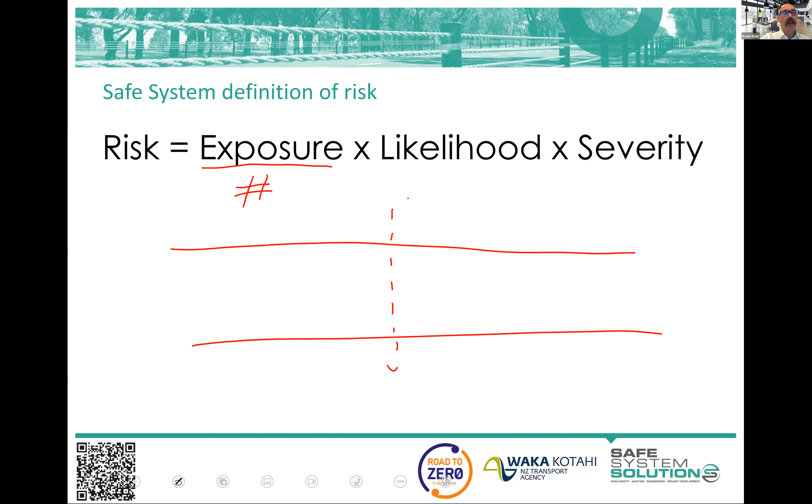We've been talking about exposure and likelihood and severity, and most people struggle a little bit in getting their head around exposure, and that's understandable. But I just want you to think of exposure as numbers. Just think of it as volume: number of vehicles, number of pedestrians, number of cyclists. Say we've got a bit of road like that, and we've got pedestrians that cross the road there. Our exposure there is based on the number of pedestrians crossing.

If you then propose to do curb build outs or curb outstands, you lessen the distance to cross. In a safe system assessment, that is a likelihood reduction. We have not changed the number of pedestrians that are crossing, thus we have not changed the exposure. We've changed the chance of a crash because they're out there for less time. Before the safe system assessment extracted exposure from likelihood, they were built together, and we would have talked about that as exposure in road safety analysis for many years. So there's a terminology confusion there, but that is likelihood.

The reason for that is that when we start to put numbers to these and quantify these, we don't want to double count benefit or double count risk. So we're trying to segment them out. I hope that helps you. Just think numbers when we're talking about exposure.

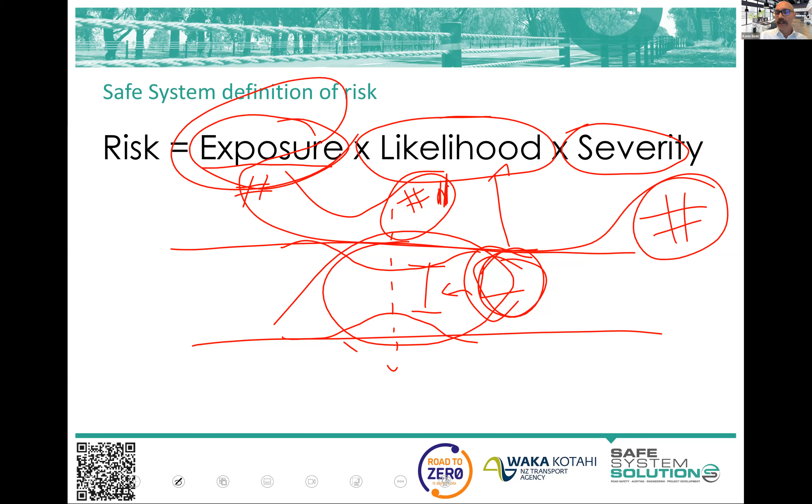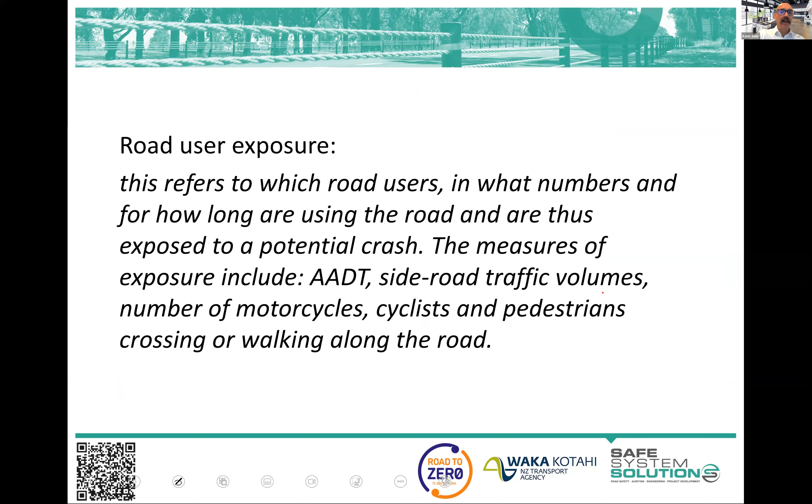When we get to the extreme ends of it and we're able to block off, in this case, a level crossing, we know that we've eliminated the exposure of vehicle to train crashes. The numbers are 0. Likewise, if we've moved the bikes or pedestrians away from the vehicles, the number of those pedestrians and cyclists exposed to vehicle crashes is lower or 0. So we've removed the conflict numbers. Here's an actual definition if you need it: AADT, side road traffic volumes, number of motorcyclists, cyclists, pedestrians walking along. So I hope that's helpful.

Now, Kathy, I'll get you to put these fact sheets into the learning management system, because over time we have identified quite a number of things that Austroads and Waka Kotahi haven't provided specific guidance or direction on. So working with industry and others, we've come to a way that we could think about this and put that down. Hopefully, if Austroads does a version 2 of the Safe System Assessment Framework, or there's further supplementary guidance provided by Waka Kotahi, this might be included.

But this tries to address some of those curly questions around scoring associated with even things like intersections. How do you score an intersection? Do you add the two? Do you multiply the two volumes? Do you multiply them and then square root the product? There's many ways people could get to that. So we've explained why adding has been the one that people have chosen.

Thinking about bicycle facilities and when does a bicycle facility influence exposure or likelihood or severity, and then how do you do a long route project? How do you assess something if you've got many intersections along a route? And so some explanation around that. And we also talk in there a bit about those seasonal or very altered times. So they might be helpful as you get into the depths and the specifics.

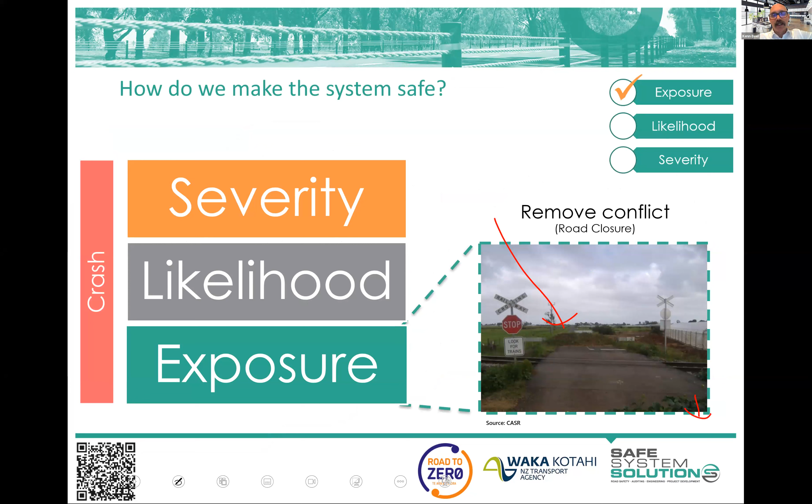So the question came in there just around level crossing one, and maybe I need to use a different photo, because it kind of looks like you can still get in there. There is actually a big amount of dirt on this side as well, which you can't see, so you can't actually drive into that area. You can probably walk into it. Exposure for pedestrians is probably different, but it's a little bit of a different view there. So sorry about that.

Sam, maybe this is a question for you, because you do a lot of the assessment of railway level crossings around New Zealand using the assessment model, ALCAM, is it? That's right. And so exposure is factored into that within the model, isn't it? Very heavily. Essentially, it's the exposure of the traffic going over and the number of trains coming along. It's all built into the ALCAM model. And the severity is pretty easy on ALCAM, because if a train hits you, there's not much else you can do, really.

So in a safe system assessment, if we have a level crossing, we treat it like any other. You're thinking about exposure being the number of vehicles and number of trains, and then you think about the likelihood based on all the factors, and that's where ALCAM has a huge raft of factors for likelihood, and then severity is going to be at your maximum end because it's a train. Yeah, thanks, Sam.

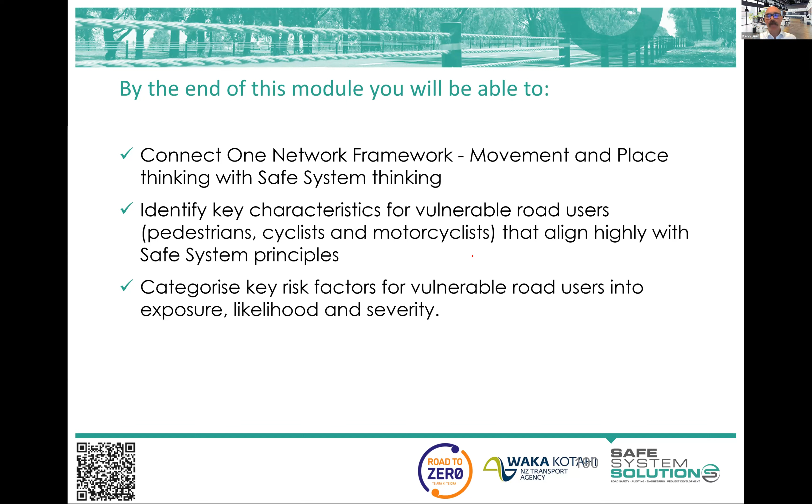So before we get into the mechanics of writing out the scoring of a safe system assessment and how you determine the number, we want to round off our thinking about the safe system and contextualizing projects by talking about the One Network framework, movement and place thinking, and why that's important within a safe system assessment, and ensuring we have a good grasp on pedestrians, cyclists and motorcyclists, what aligns with safe system principles, and the risk factors associated with exposure, likelihood and severity for vulnerable road user groups. That sets us up for next session, where we dive into filling out the forms.

Now, the One Network framework, movement and place, is something some of you are absolute experts on, and probably wrote some of the guidance and documentation for Waka Kotahi, for AT and for others. By no means within a safe system assessment do you need to be an absolute expert in it. But the reason we want to understand the context of a project within its strategic objectives for that network is not really particularly for the assessment of a proposal.

It's for the recommendations that we make, because you can achieve very good alignment with safe system principles in many different ways, but it comes at the cost of one thing or another sometimes. It comes at the cost of the time it takes vehicles to move through an area, or time it takes cyclists to move through an area, or it could come at the cost of the place, the feeling of place in an area, the community interaction, trading, socializing in that area.

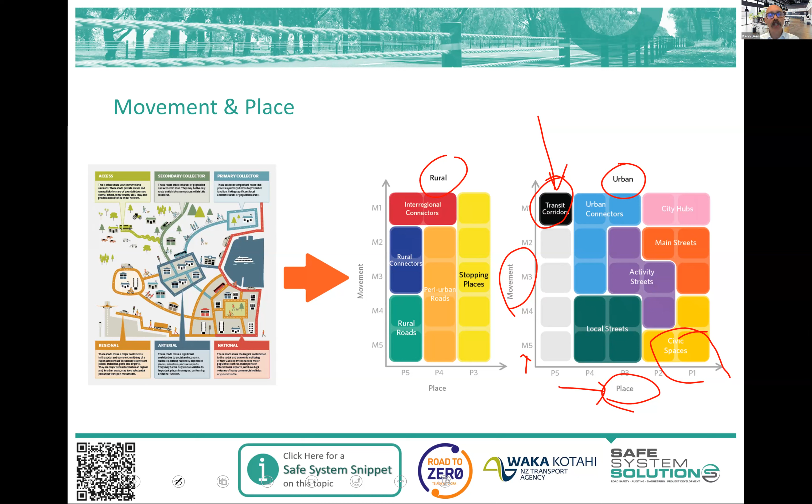But when you're embarking on a safe system assessment, talking to the project team and potentially strategic planners for the council or Waka Kotahi or the other area to understand what are they trying to achieve out of this? Where does it fit within the strategic framework? What are the movement and place categorizations of this? That helps you then with those recommendations. So if you're down in civic spaces, we know we're into these environments where we can look for safe system aligned measures that also give us that ability to trade, to interact, and to have an area where people congregate.

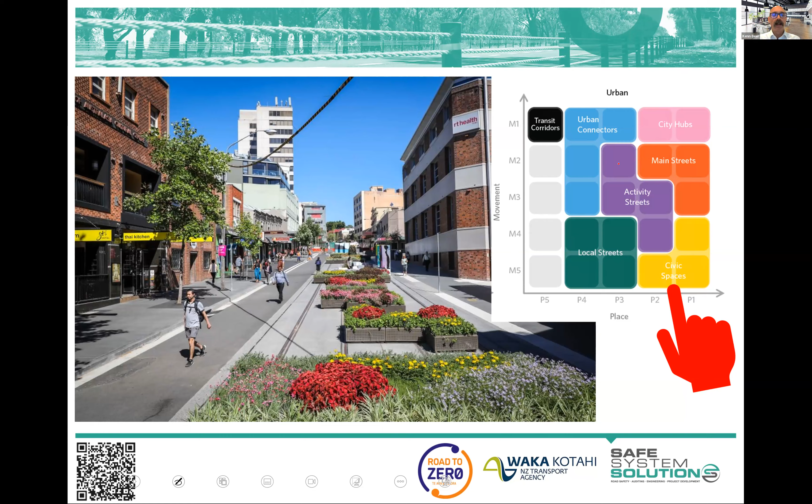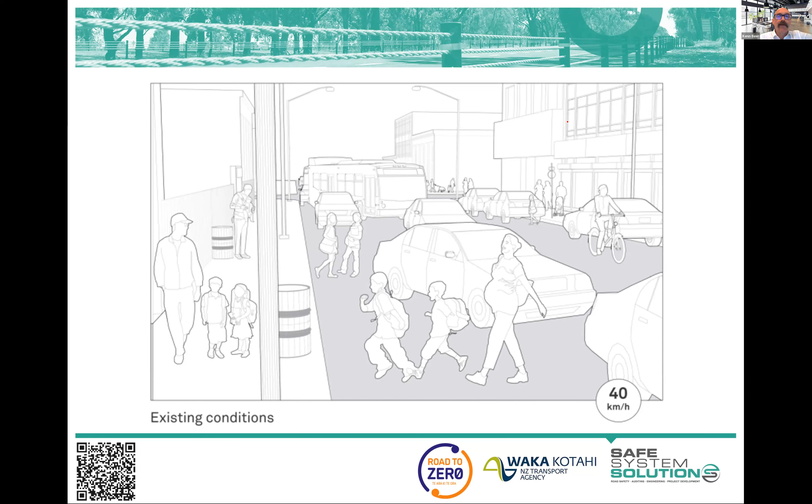So I think that's all I'll talk to on that one, and some artistic impressions, just for fun. This is actually US guidance, but you can immediately see it's more of a place for people there to hang out, trade, socialize, play, have a coffee. You can see it's going to be safer. You're going to get less vehicles through there. So your exposure will be low, but being able to quantify that's interesting.

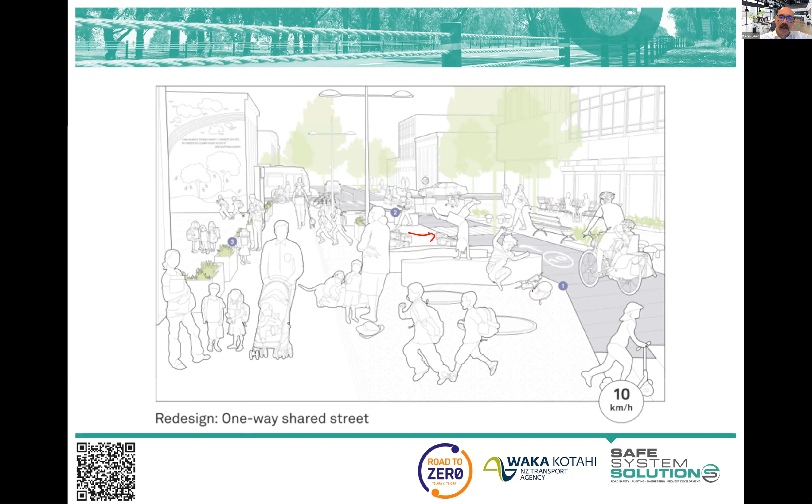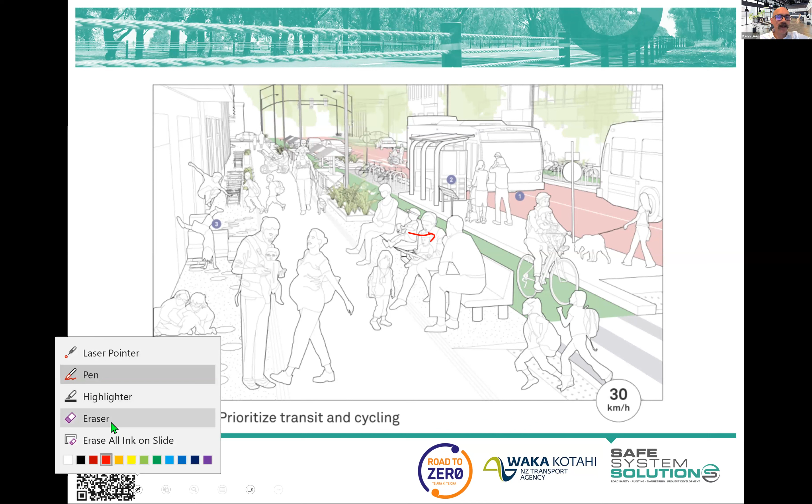I don't particularly think they need that crossing point. I think the whole area as a shared zone is fine, but I think you get the point. As movement demand increases, or your strategic planners are talking about more movement, as I mentioned, segregation of mode and creating those throughputs through mode has very good safe system alignment, and you're still able to maintain pretty good place value, as you can see there in that artistic impression.

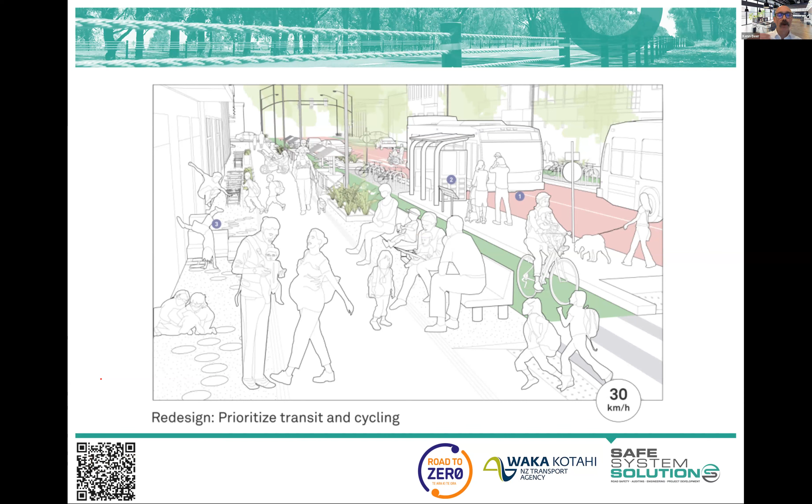Now, you take these with a grain of salt, and it's hard and messy to actually move through and get these sorts of things. But if you can see them as aspirations and work towards them, it's good and it's helpful in our thinking about recommendations. So I'll keep us moving along. We've got just about half an hour to go.

Local streets in this categorization, there's a whole lot of different terms around the world for how people categorize movement and place, or link and place. The principles are the important ones. So at these lowish place value, low movement areas, local streets, residential streets and the like, you really start to think about safe system alignment through management of speed, because we're able to take advantage of these lower movement requirements. So vehicle speeds can significantly be reduced, giving our safety outcome from that perspective.

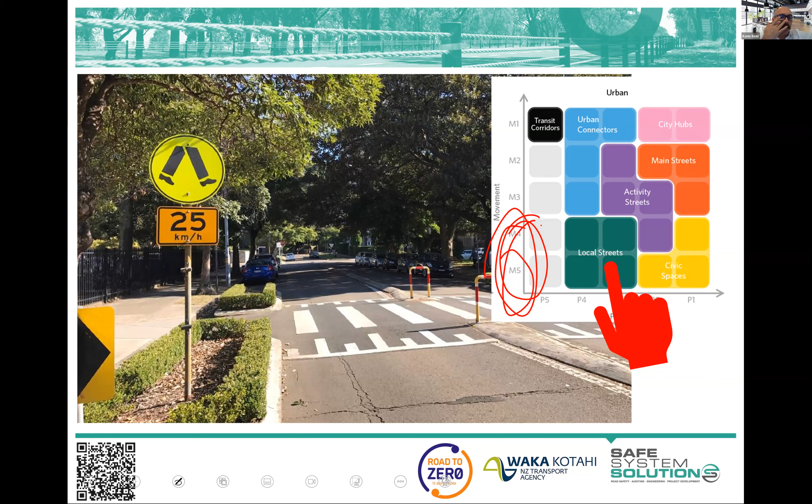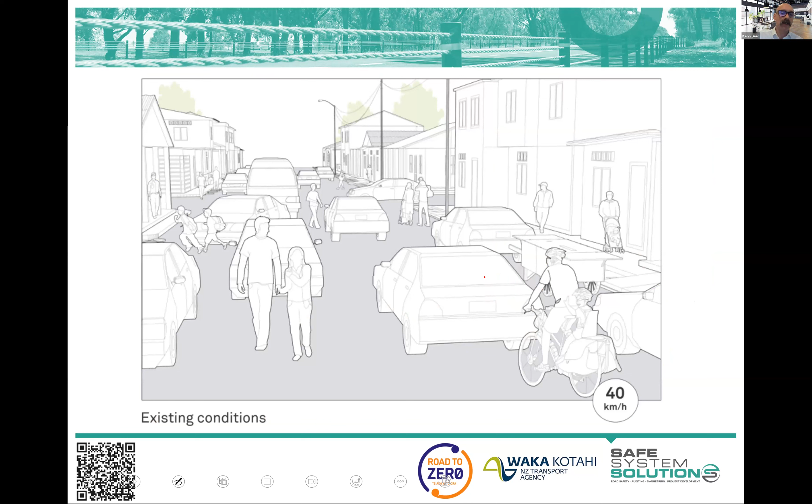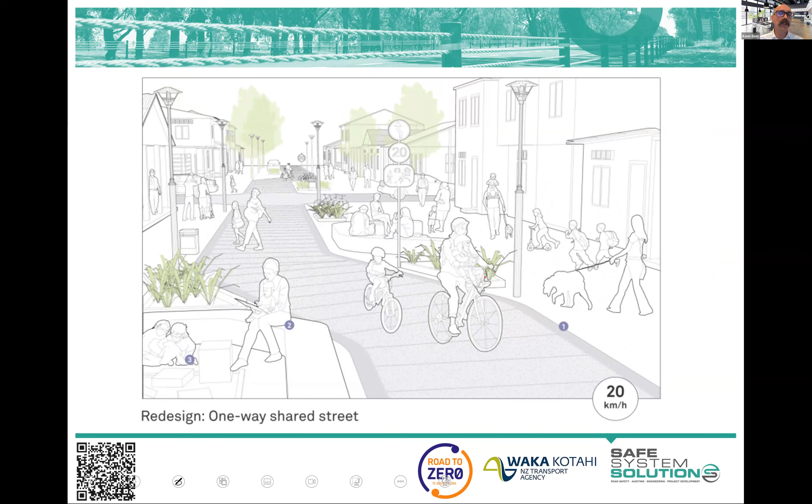You're not going to do things to, in any way, shape or form, increase vehicle travel speeds through there, because the importance of that is not there. And you do erode other social benefits and active transport choices and those sorts of things. So this is a very populated residential street cartoon, but again, we see slowing of vehicles significantly, because the movement of people and goods through that area is not important. It's minor access, and we can slow vehicles down.

The challenges really begin, and I always talk about this. It's easy up here, and it's easy down here, and generally kind of easy in there. It's up at this end where it's just really hard, because people are asking everything from a corridor. They want it to be the public transport priority. They want vehicles to move through there quickly. They want everybody to be safe, and they want it to be a vibrant place where people can hang out, and it becomes a real challenge.

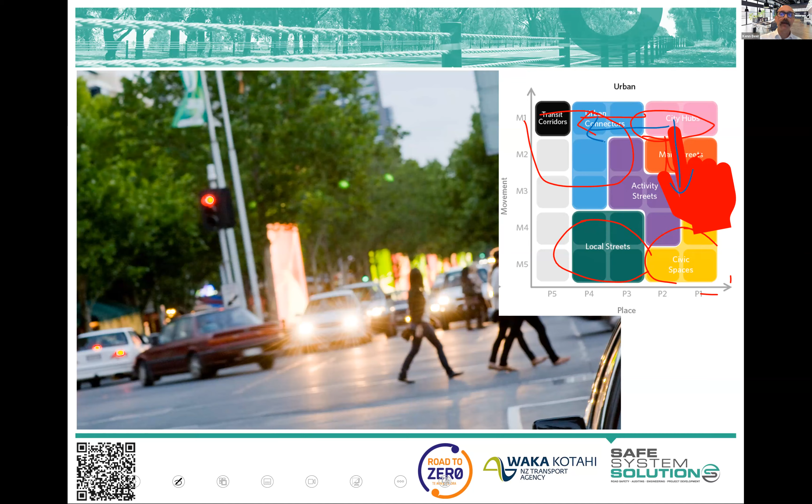I always will start in a safe system assessment and try to push strategic planners or project teams and say, no, give me something to work with here. Tell me, are you wanting to go this way, or are you wanting to go this way? Oh, it's a bit harder. Are you wanting to go this way? Give me something. Because as soon as they're able to do that, it really frees you up in how you're going to alter or suggest altering this network. But sometimes it's very hard. So we'll do this one very quickly.

We're getting some Wally advice in the chat.

This one, for example, you've got a road here and we say it's really aspiring to actually sit in the city hubs type area up there in the pink. It's currently high traffic volume, it's got a lot of pedestrian activity, it's got pedestrian overpasses, and you can see that. What sort of alterations, again, with your exposure, likelihood and severity? Quite quickly here, chuck a few ideas in on this type of environment, sitting in a very different categorization there. So any thoughts on that?

Yeah, so I'll... Ooh, one of those fancy Brazilian bus stops? I'm not 100% sure what is meant there. That's brilliant, Jenny. You could write anything. One of those fancy Ukraine, oh no, not Ukraine. Anyway, you know what I mean? You could just about write anything. People go, oh, sounds good, you got my attention. Fancy Azerbaijani roundabouts. Yeah.

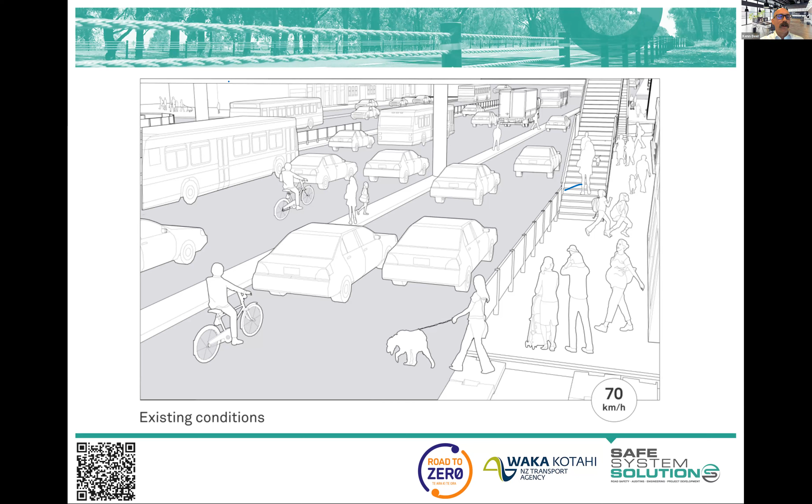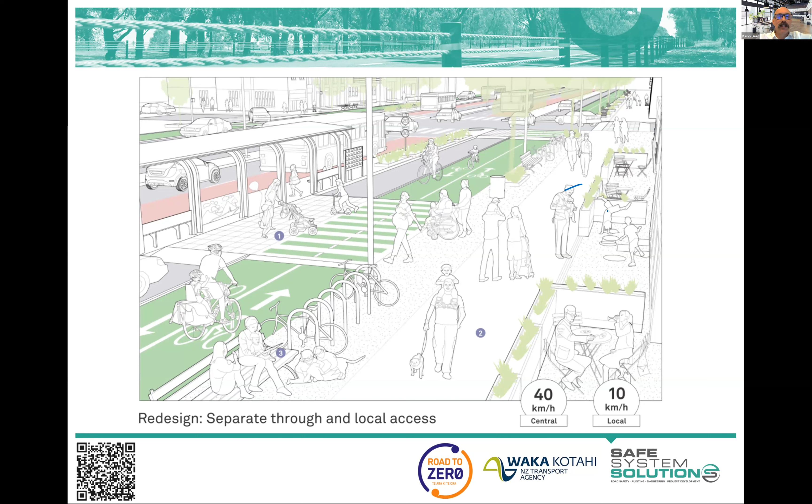Okay, so let's have a look what the artists have done here. Take everything on artist impressions with a grain of salt, but I think the overarching look and feel of it in that large carriageway style gives us that movement function through different modes. Yes, it's probably not going to be as good for cars to get through there, but in terms of getting people and goods through, I think we're still achieving our requirements at reasonable speeds. You can see the increased place value of the area, and the safe system alignment is fairly clear with raised intersections and separation. We do see this movement towards areas that maintain a movement function of people and goods and are having some place value.

Now, you may question, can we go further into the place and actually start to really limit movement of vehicles through these areas and the like? But if everybody's prioritising everything, then that's what it is.

And of course, signalised intersections do often play out in these sorts of environments, and I do remind that protected intersections are very well aligned with safe system principles for reducing the likelihood and severity of crashes, where we have the vehicles making that turn where there's great sight lines.

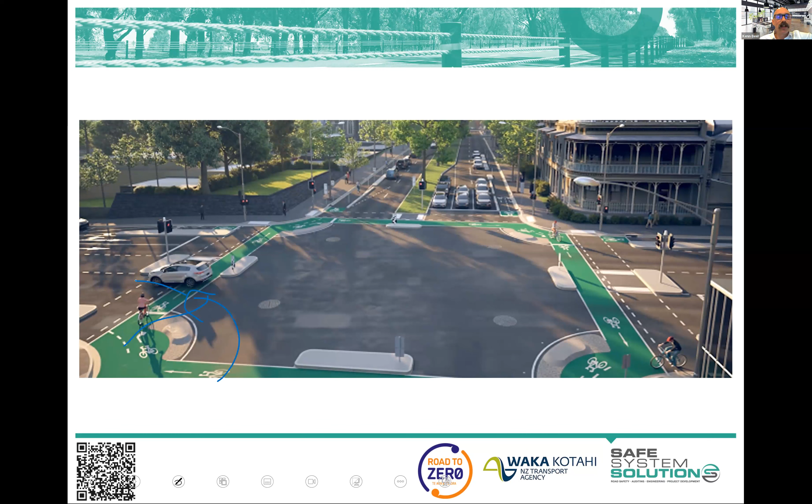Now, in this course, I'm not going into a lot of the details of anything associated with infrastructure design or specifics and the like, because we're just setting up a set of principles for you to look at any area. But these sorts of features tend to align really well with what we're trying to achieve there.

Then when we get into the urban connectors or transit corridors, somebody's made a distinct choice to move people and goods through that area at speed. Now, okay, the picture I've got there is of vehicles, but it could just as well be of a dedicated cycleway, or the like. But you're going to try to maintain some speed through there.

And this is where you start to get into those things that we talked about, possibly pedestrian overpasses, possibly fencing off areas from pedestrians crossing, congregating, and the like, because a distinct choice has been made. Yeah, sometimes people get annoyed at this, but if we're going to manage our whole transport network, some of the roads are going to be transit corridors, and thus we should try not to think that we're going to do everything for that corridor.

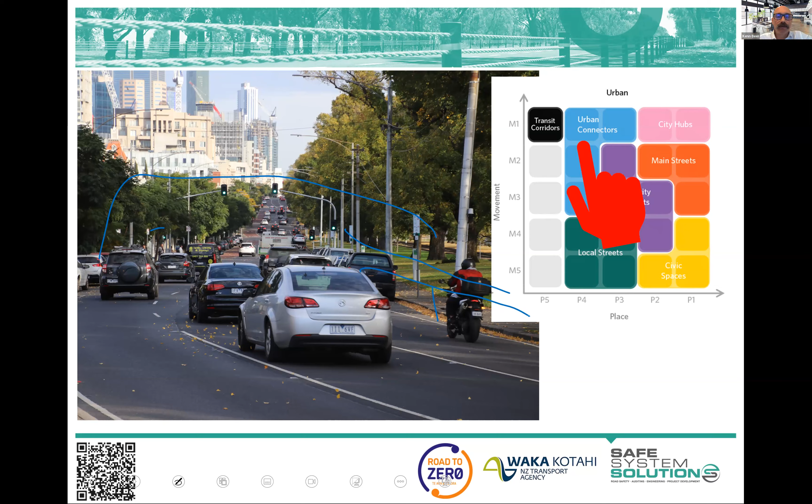And we do still need to be very conscious that even though it's a movement corridor, areas of conflict above our safe system tolerable thresholds need to be addressed, such as our large signalized intersection. And we need to bring speeds within tolerable levels within these locations, as you saw with our raised intersections and those sorts of facilities and features.

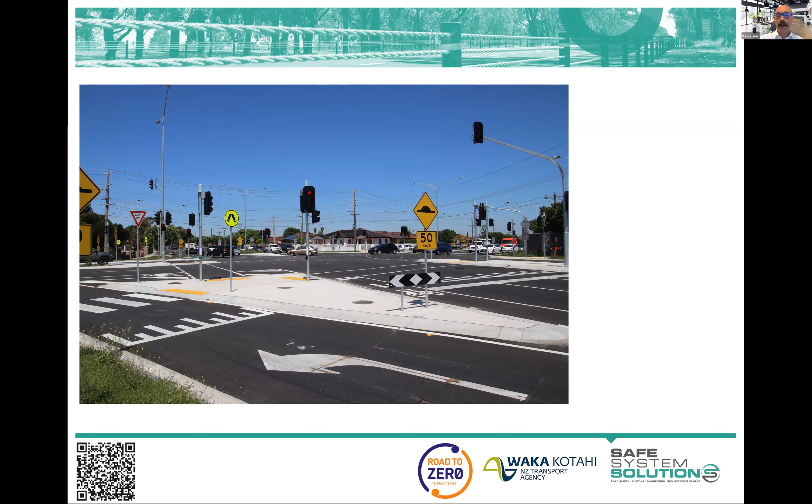I think people thought Wally was asleep or something, but he's still here, don't worry.

Okay, so cyclists and pedestrians, obviously the most vulnerable road users, and we're talking severe injury risks even around 20 kilometers per hour. And then as we saw, 30 kilometers per hour is where it really kicks up badly. And young and old, even more vulnerable. In a safe system assessment, you may factor a little bit of that into your assessment, but it's probably not enough to make major significant changes.

Old people obviously can't handle forces anywhere near what younger people can. Young people actually withstand a lot of force. However, often the mechanics of crashes are young people being struck in more vulnerable parts of their body, the head especially.

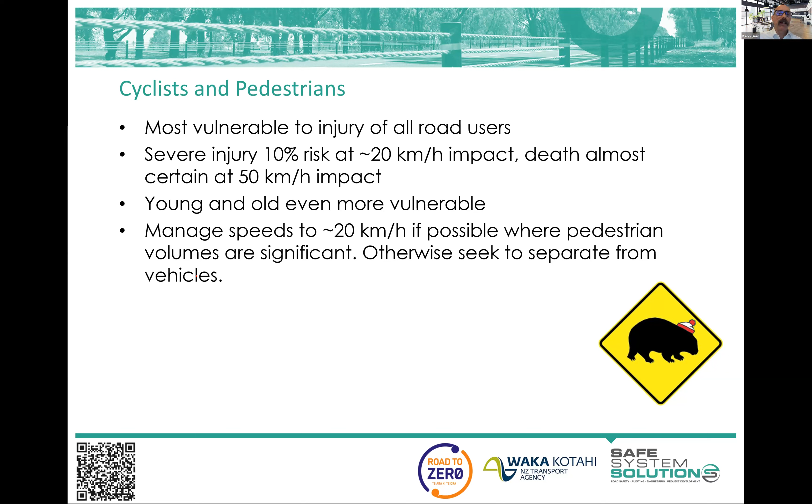So thinking about managing speeds down around 20 kilometers per hour where pedestrian volumes are significant is important, and otherwise trying to separate it. And that sounds simple, but it's very challenging. But separated facilities, Copenhagen style lanes, and I've got pictures on this presentation from all over Australia, New Zealand, and around the world, of different ways to think about it. But the principles are there that we are separating those modes.

Now, remember, I had a full fact sheet on whether this sort of treatment is going to impact exposure or likelihood or severity, because it gets a little bit challenging to do that. If there's no access points and you've done that at the mid block, I would say that's exposure. If you've got intersections and access points, I would say it's likelihood, because you've still got the chance of a vehicle to cyclist crash, but you've lessened the likelihood of it for a number of reasons.

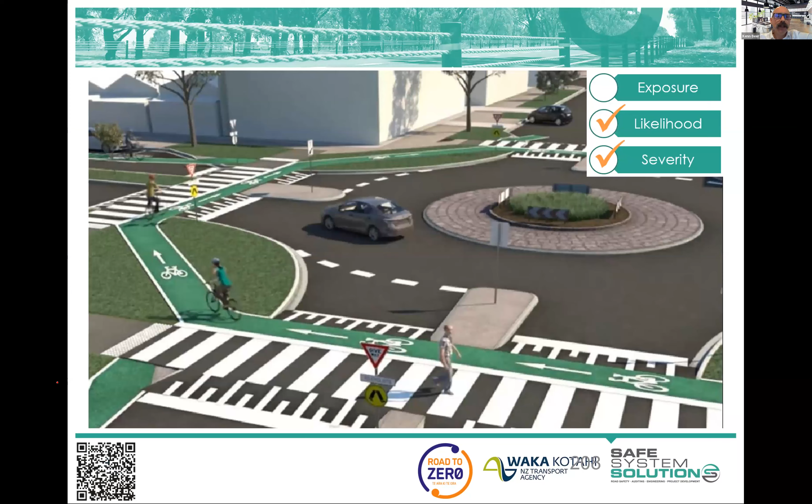And roundabouts, of course, I'd like to show the way you can continue to maintain those wonderful safe system features of a roundabout, and all the different benefits, but also provide facilities that reduce the likelihood and severity of crashes involving pedestrians and cyclists, such as these protected roundabouts, as you can see there, with features around it slowing vehicles at conflict points, reducing the likelihood and severity of crashes at these locations.

And also, this is a wonderful place-making feature, but also a movement feature for those other categories which are often forgotten, which is pedestrians and cyclists. They are movement. They require their movement function as well. And if you're prioritizing those modes in different areas or different streets or roads, we should be catering for that.

And it gets challenging and murky when you get bigger, and we see very challenging pedestrians and cyclists through multi-lane roundabouts, and I don't think anybody in industry's got this right without spending a massive amount of money, which I think we should be doing often with pedestrian and cyclist underpasses over the multi-lanes. But this is where we're getting stuck in trying to do multimodal shares.

But these ideas are decent, where you actually create priority for pedestrians and cyclists through these sections, and then I'd like to see these go under if you can. But if not, what we're trying to do is reduce the likelihood of crashes as much as possible through squared up and places to wait.

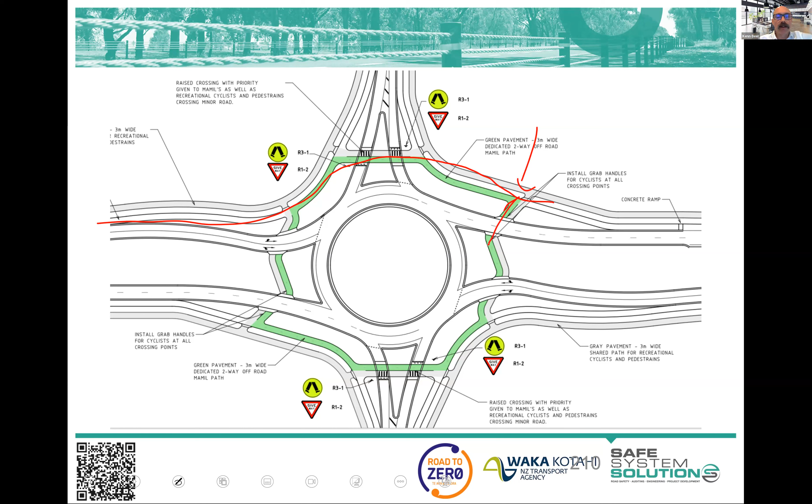From an active transport use perspective, it's not great. It's going to very much limit. You're not going to have old people crossing the road here, that's for sure. So you've got to factor that into your thinking, and cyclists, it's only going to be fairly confident cyclists that are going to dart across multi lanes of traffic there. So limitations there.

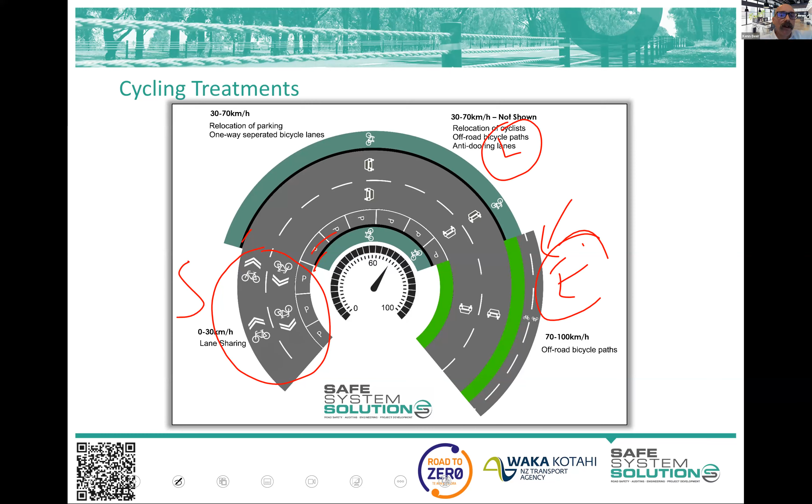Pedestrians. If we've got an area that has enough pedestrian activity, or we're aspiring to enough pedestrian activity to prioritize pedestrians, it's imperative that we address the severity of crashes at that location. And so I can't see any environment where it's acceptable to have an at-grade pedestrian crossing, so a zebra crossing, without some speed management measures.

If the area itself is very well speed calmed and the speed on the approach to these is low, fine. But if the speeds are above that 30 kilometers per hour, speed calming measures have to be put in place to give us the severity reduction. And we know that raised crossing there, for example, is highly aligned with safe system principles, because we know there's a reduction in the likelihood of crashes and severity of crashes.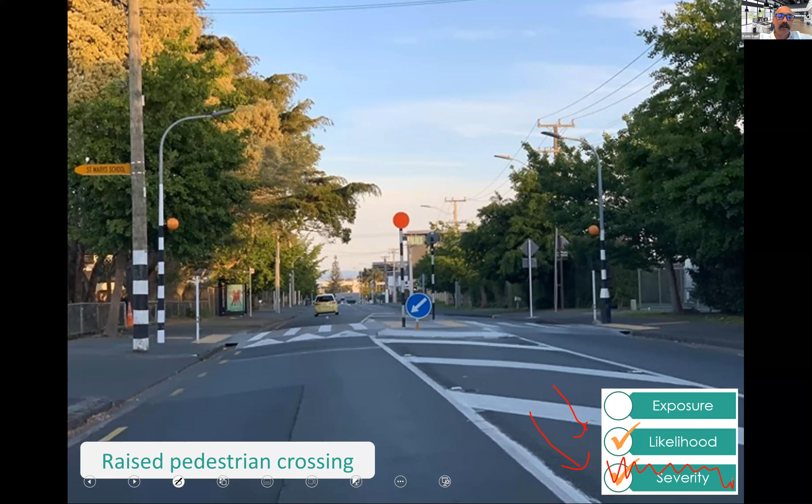However, if we were to make that just a zebra crossing, we actually know that we've eliminated severity reduction out of it, and likelihood is highly questionable, because pedestrians are less looking for vehicles because they've got priority, and some vehicles are going through at speed still. So I say unashamedly that a zebra crossing is not a road safety feature. Okay, it may encourage more people to walk and that's good. But from a pure death and serious injury to your community perspective, it is not a road safety feature.

Raising it like this is up at 70% reduction in death and serious injury for pedestrians. Now, there's all sorts of things we could talk about with raised crossing design, and things that are going to lessen the likelihood even further with appropriate lighting and sight distance on the approach. And then there's your civil characteristics around how you do your drainage and when you use refuges and not, and the like. So a huge amount packed into that.

But from a pure safe system assessment perspective, you're going to take all of that thinking and look into it to help you analyze the likelihood of crashes. And then the severity of crashes, you're thinking about, well, what speed is a vehicle now going to hit pedestrians at? And are we within ranges we see as tolerable and acceptable?

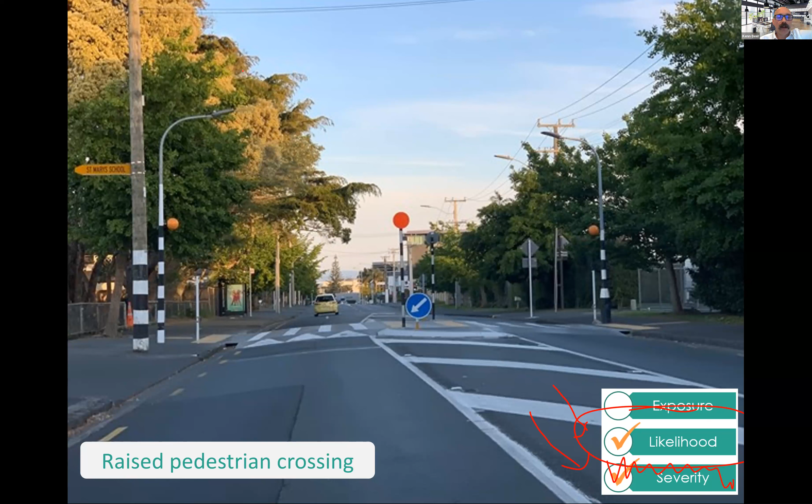And I just thought that a nice analogy on pedestrian, particularly pedestrian safe system alignment, fits in here. And I'll probably end this very shortly. We kind of know what a safe system road environment is for pedestrians, or a very highly aligned one. Let me give you this example here.

So for some reason, we understand the vulnerability of the workers and that vehicles are going to make mistakes and they're going to leave the road and they need to be slower and the like. But we afford that level of protection to the workers. But as soon as it comes to the general public, well, it's on them to protect themselves. And we need to sort of push and alter that.

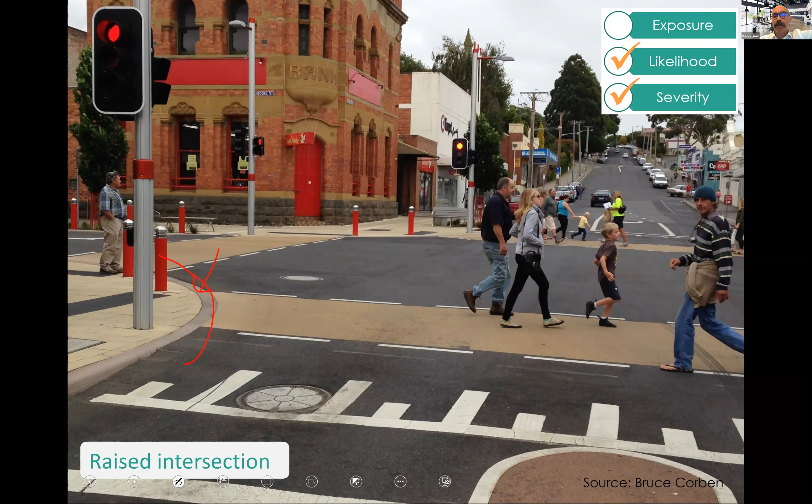We don't have time to go into it, but one I always note to people is you tend to remove your curb when you raise an intersection, and that can cause a little bit of trouble with vehicles turning. So some sort of way to stop vehicles tracking over pedestrian areas is important, but that's a little specific aside. Raised thresholds, reducing likelihood and severity of those crossing points, and even just speed limit reduction.

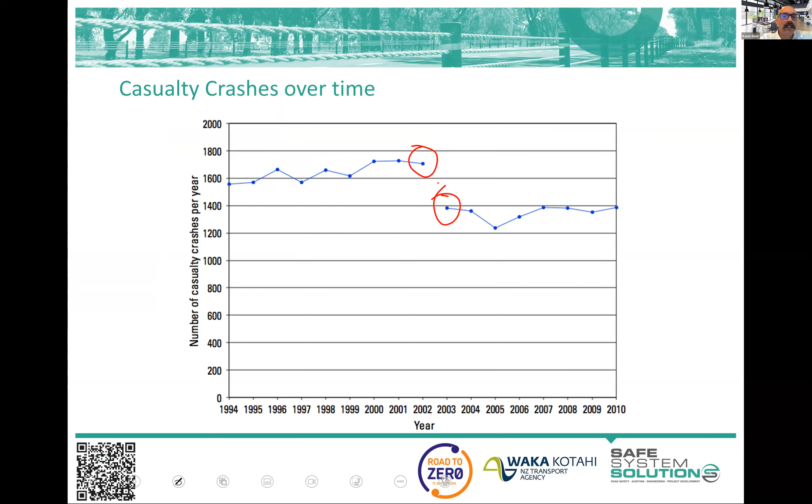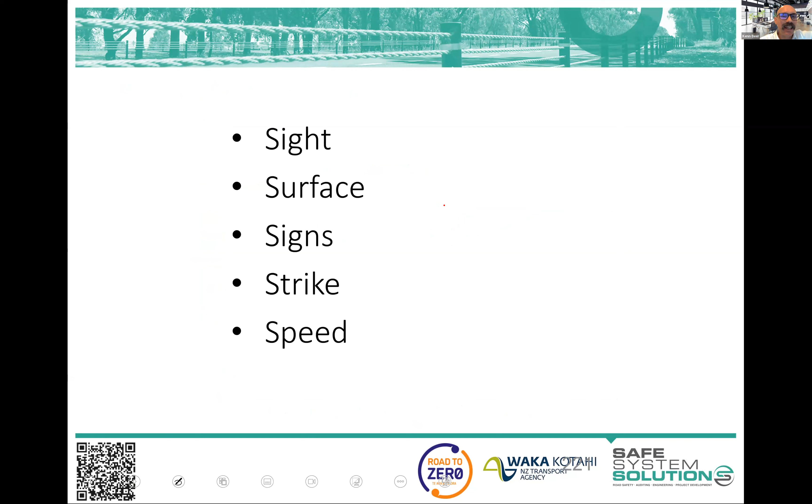So taking a default speed limit from 60 to 50, you can see the step change you get in a year. Speed limits are very important. They continue to work. So motorcyclists, and anybody who's done the audit course with me knows I talk about sight, surface, signs, strike, and speed. And the first three there are addressing the likelihood of crashes.

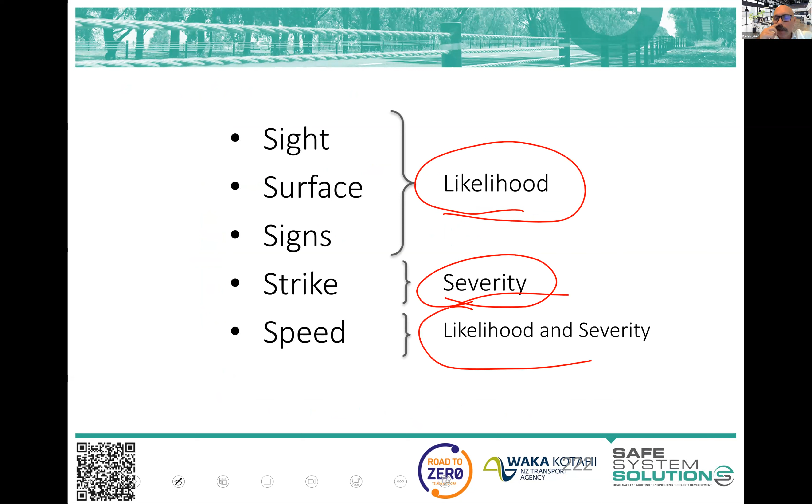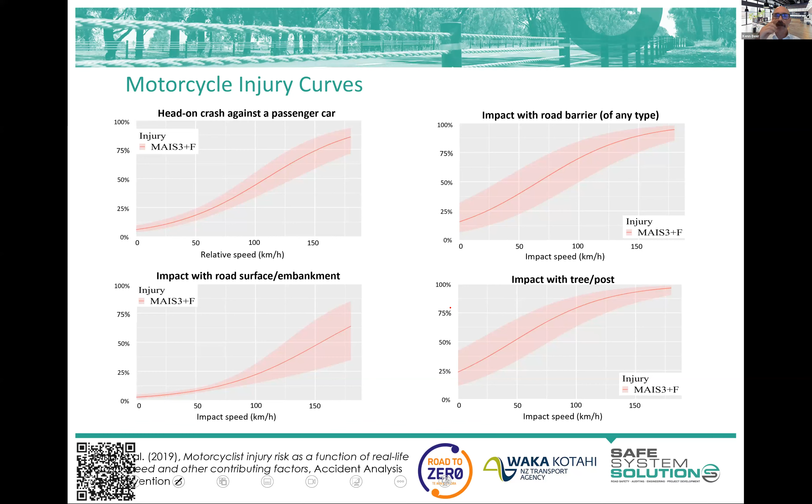Strike is the severity of crashes, and speed is both likelihood and severity of crashes. And there's been a release of a bit more analysis around the severity of motorcycle crashes, and I'll point you to this and some fairly recent research that's been released showing that motorcyclists are actually up from pedestrians and cyclists. In the past we just said severity of crashes with motorcyclists is going to be the same as pedestrians or cyclists because we don't have better data on that. We do now, but it is not as good as for cars. So motorcyclists sit somewhere between pedestrians and cyclists and vehicles. And I think most people would have logically come to that conclusion, but it's good we've got a bit of data to back that up.

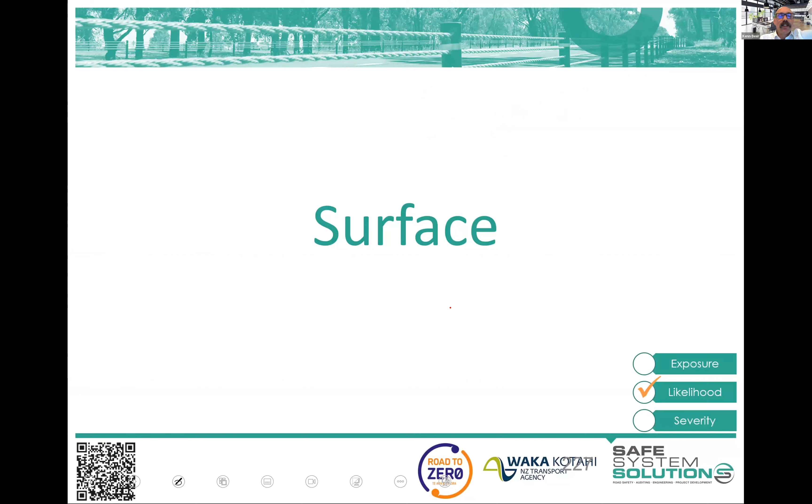So just thinking about it, there's increased likelihood of crashes for motorcyclists because they're hidden behind trees or signal controller boxes or smaller objects. The surface is really important associated with the likelihood of crashes, especially because of that lean of a rider and the small contact patches and braking, and riders being susceptible to surface issues like potholes, ruts, flushing, even steel plates and other things. So as you assess, you're looking at those and factoring them into the likelihood of crashes.

Motorcyclists are very attuned to signage and appropriate warning signs and guiding and informing and the like, so we can get reductions in likelihood by signage, and they're one of the road users we get the most benefit from in terms of reduction of likelihood from correct, consistent and appropriate signage, and if you need to, warning riders specifically of hazards and the like.

We talked about strike there for motorcyclists. The tolerance to physical force sort of maxes out around that 30. So here you see European crash tests at 60 kilometers per hour for a motorcycle crash test dummy into posts and underrun protection. They're survivable where we redirect energy, but a point source hazard is unsurvivable. The forces cannot be survived when striking upright single point source hazards. You need to redirect, but we can. Underrun protection is probably a great example for motorcyclists of that severity reduction technique.

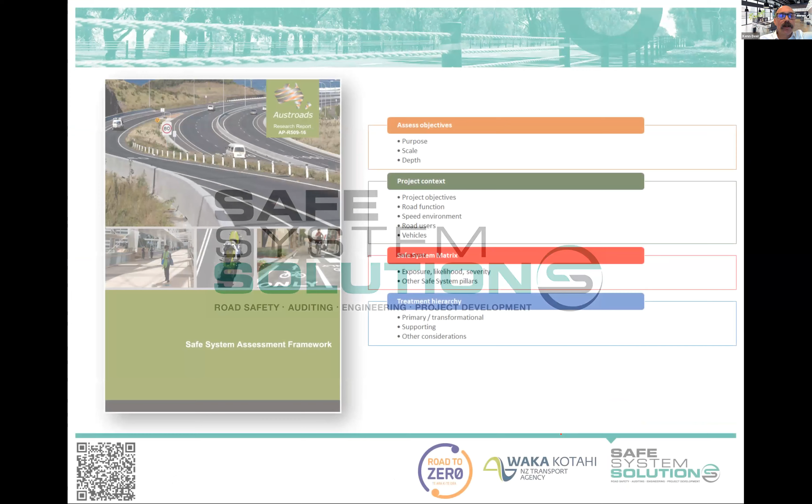So we'll pick up next time and we're jumping into the mechanics of the safe system assessment, because I think we're all in a really nice spot now where we can understand, okay, that's what we're trying to achieve. Now let's work out exactly how we score the existing road, we score designs, and we make appropriate recommendations. And that's where we'll pick up next session. Anything I missed there, Kathy?

Just two quick ones, if you can, Ken. Earlier question: are cycle treatments treated differently depending on the terrain? For example, separated if uphill, but combined cars and cycles if downhill? I mean, yes, it's very site specific on that sort of stuff. That is a bit of thinking more in your touring route style stuff, which is good because it's about speed, a bit of differential in speed and the like. But it's usually a bit more complicated than that.

And a question that came through earlier: can you undertake a safe system assessment for an area-wide treatment, or would that be similar to assessing a route? You can do it for an area-wide treatment. I'll talk a little bit more about the scalability and the way you can look at these different safe system assessments in a later module, as I will for the question Chris has just popped in there about specifically what's the Waka Kotahi guidance versus Austroads guidance and are there differences?